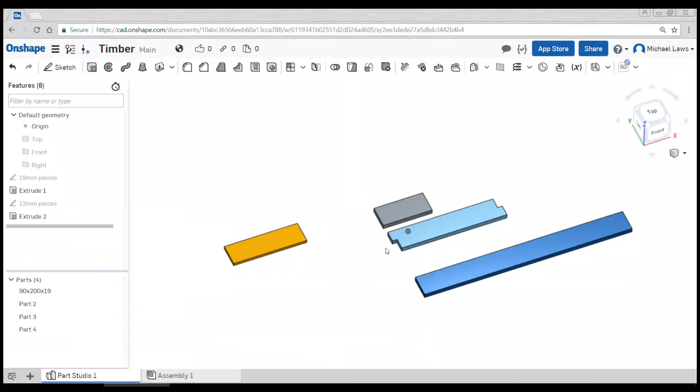Okay, in part 2 we're going to do some more advanced techniques. The first thing that will be commonly used would be a chamfer. We have a button for both a fillet and a chamfer up on the top here, so we'll click the chamfer. It's simply a matter of clicking all of the lines you'd like to apply it to.

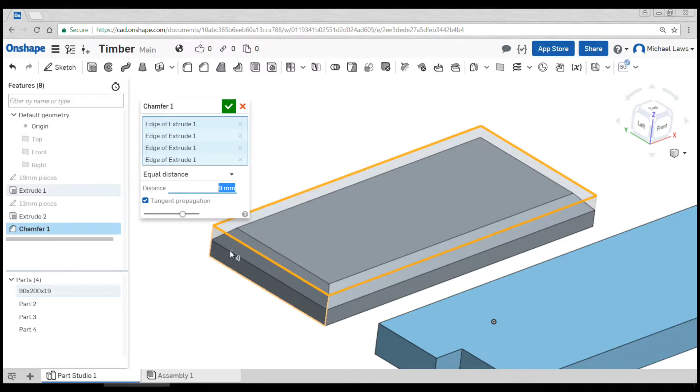Now you have two options. You can either type in the distance, or sometimes you'll see an arrow which you can drag, which doesn't seem to be coming up right now. So I'm going to go for a 9mm chamfer, which should leave 10 behind, and tick to hit OK.

Next thing I'd like to do is something like a dovetail joint. So I might edit my first sketch, click on top to spin around the camera, and I'm going to draw one half of my dovetail here. Once again, dimensioning as I go, so 19, to match the thickness. I'll do a very simple dovetail joint.

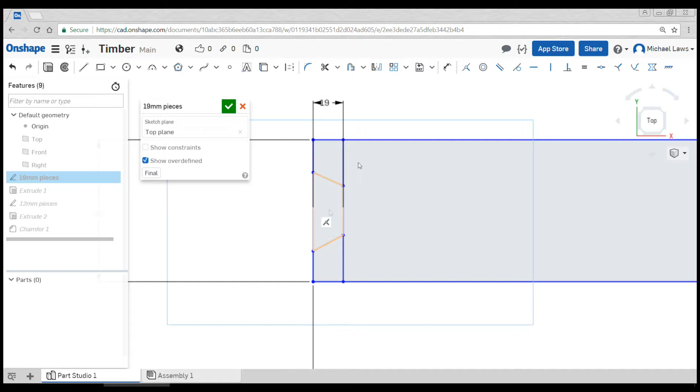So a couple of lines between here and here. Using the dimension tool, I can actually dimension the angle by clicking on two lines that aren't parallel or perpendicular, and then I might set this to 60. I can also set this side to 60.

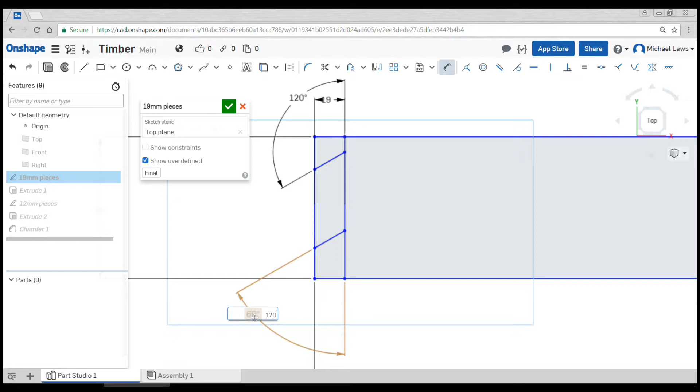Actually, I want it to be a lot further than that. I actually need it to face the other way. Okay, that looks more like it. I'll come up to the trim tool and delete the segments I no longer want.

And now we're going to do something a little bit fancy here. We're going to use the equals button. I'm going to click on this line and this line, and you can see that's going to move it into the middle. We've lost our dimension for the overall width, so we'll set that back to 90.

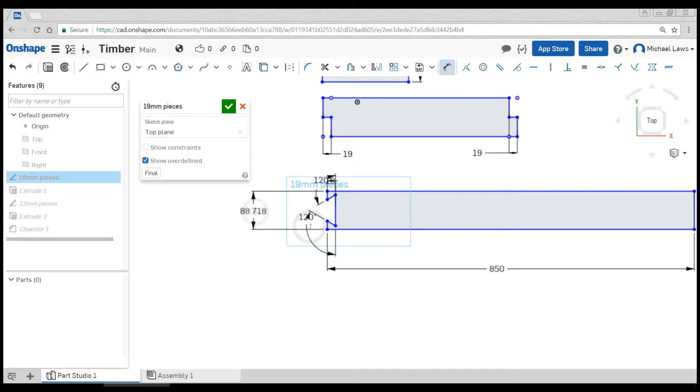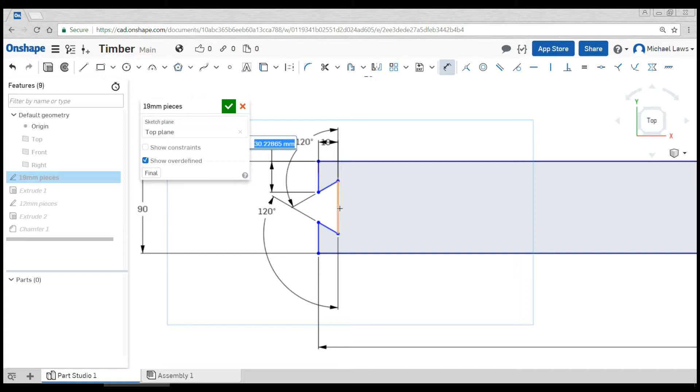So now if I click and drag these, you can see it acts symmetrically. It's locked in at that 120-degree angle. But when I click and drag one, because this one is set to equal that one, they're going to move around the center point. So all that's left to do is to dimension this one here. And my piece is complete.

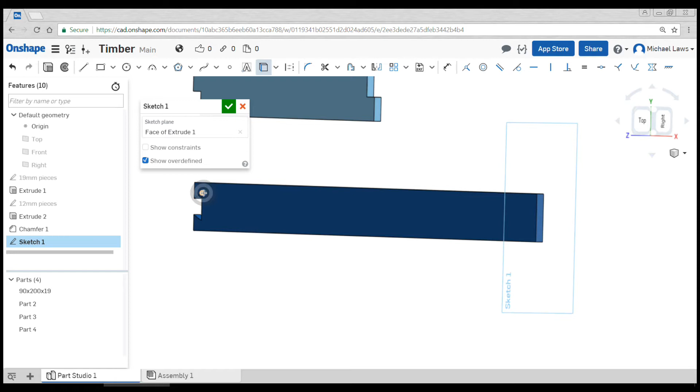Now on the other side, to make this work, I'm going to need to have my cutout on the end. So I'm going to go to Sketch, click on the end of it, and then we're going to use this button here called Use, which will trace some different things. So I can click on these points here, and now when I come to here, it's traced on those points and I have something to snap to.

Okay, so like we discussed, snapping from that new line, and if I hover like this, I can snap until I've drawn the shapes. So I hover over where I want it to be in line with, and then I get a dotted orange line, you can see. That's helping me snap it.

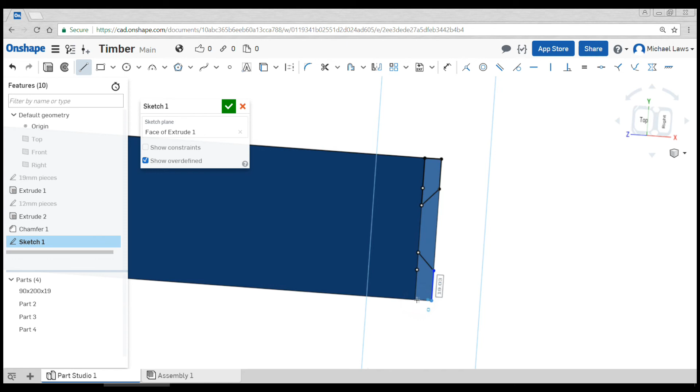Okay, that one is finished. This time I'll go to extrude again, and I'll click on my two bits, but instead of saying add, we're going to put it to remove. I'm going to run it back the same thickness, 19. Hit the tick.